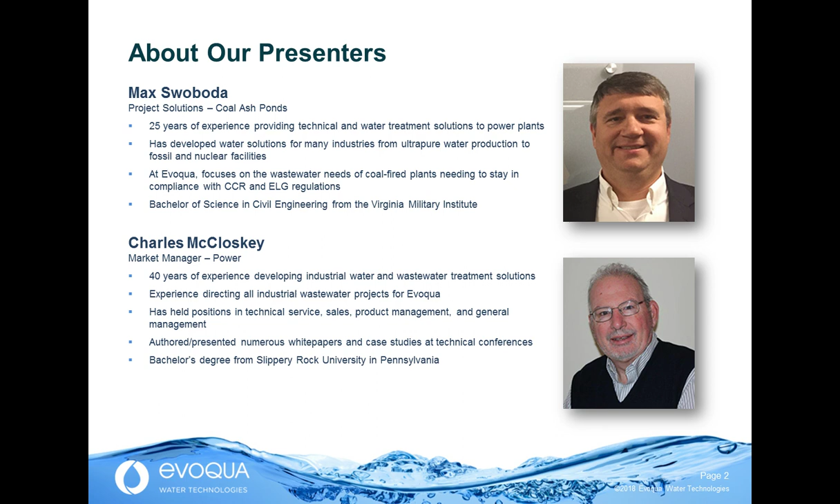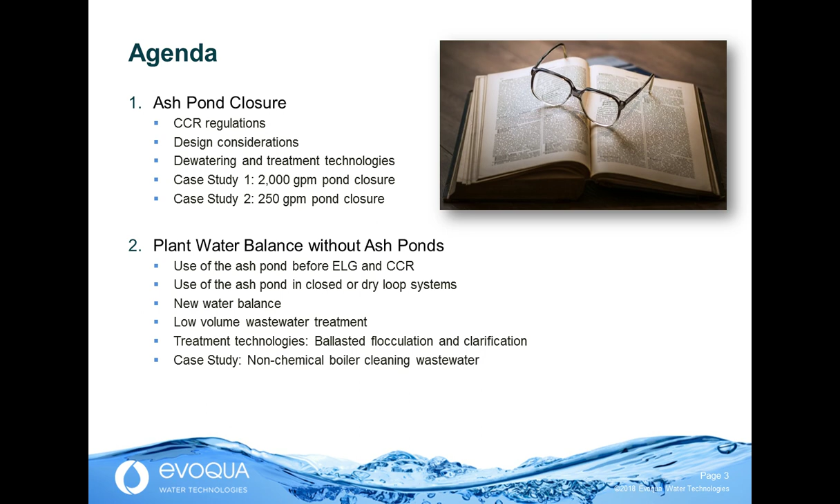Hello and welcome everyone. Today I'll take 10 to 15 minutes to step through some typical ash pond closure design items and case studies. Then Charles will take over for another 10 to 15 minutes to discuss life after ash ponds and what a future plant water balance looks like. He will also explore one resulting issue in depth, non-chemical boiler cleaning wastewaters.

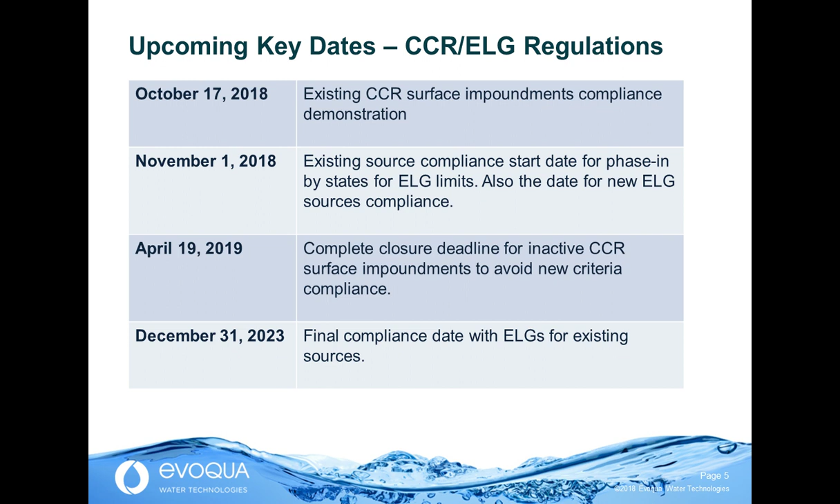Since the calendar has rolled over to 2018, we are already a number of years into compliance with CCR regulations. The next set of pending deadlines starts to come into play towards the end of 2018 and 2019. During this time, many source waters will be diverted from CCR impoundments and will require treatment systems to close the impoundment. Being less than 1 year away, the deadline is generating interest in temporary treatment systems while plans and construction of permanent systems are ongoing. Concurrently, groundwater monitoring and systems for corrective actions are also anticipated.

That brings us to our poll question here. How will these key dates for your CCR and ELG regulations affect when you need to stop using your ash pond? All right, the responses that are available here are: my plant will stop using our ash pond effective January 1 of 2019. Or we'll continue using our ash pond beyond January of 2019. My plant's ash pond closure is in process or already closed. Or I'm not at a plant with an ash pond. And you can begin answering at any time.

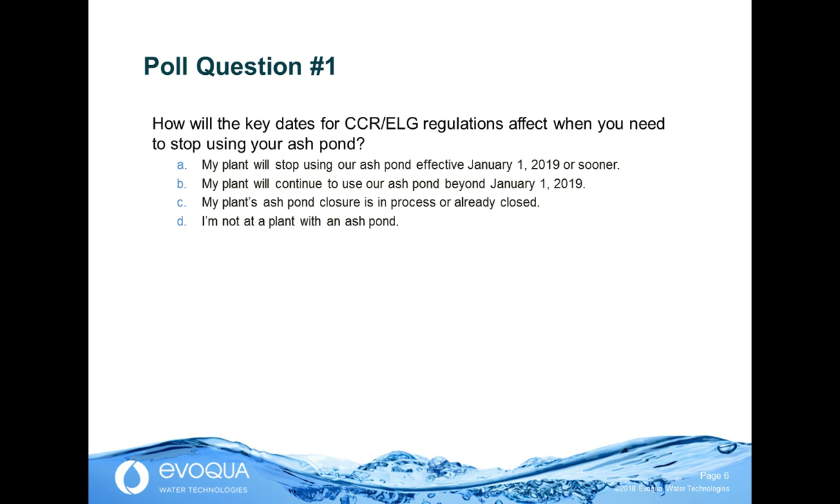We've got quite a few responses already in. Looks like we've got a lot of webinar attendees who don't work at plants with ash ponds, but they are split pretty evenly among the others that are still using or will stop using by 2019. We'll give you guys a little bit more time to answer the question and send out the results. All right, Max, I'll hand it back over to you. You can continue. Thank you.

Once this portion of the pond is disturbed, inlet water characteristics can change quickly, and the system needs to react to those changes. Groundwater from extraction wells and leachate can be low in TSS, but if this water was in contact with ash, it could require similar treatments as interstitial water in regards to the specific contaminants. Co-precipitation or reactive medias can be used to target these contaminants.

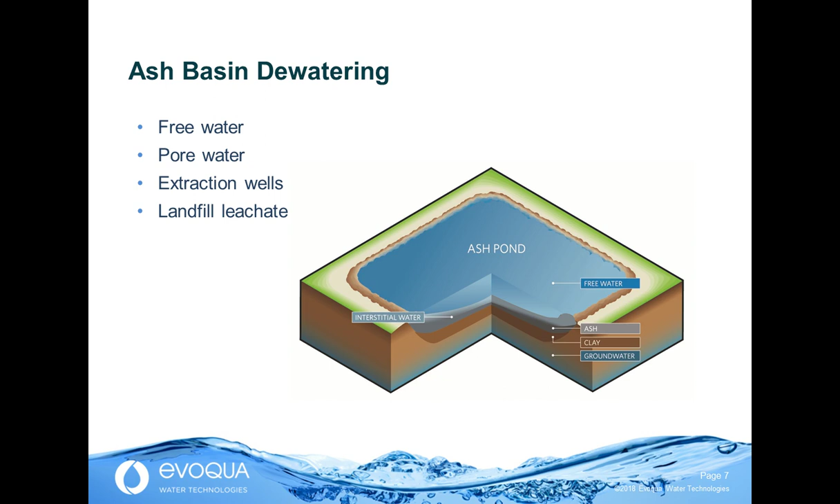There are several unique considerations in the design of ash pond treatment. First, timing. How long will the pond closure take? Size the system to match the schedule. Also, ensure that it can overcome setbacks from rainfall collecting in the drainage area. Public involvement should be expected and can cause delays, so seeking state approval before you mobilize your system is critical.

The location. The ponds are not conveniently located to plant infrastructure. Some compromise with regard to the distance from plant infrastructure and utilities is needed to provide proper support for the treatment system. The use of diesel-powered pumps and generators is quicker to set up than a dedicated electrical service. But on the other hand, running an electrical service eliminates the need for fuel, is more reliable, and could save money on longer-term projects.

Potable water is hard to come by in most remote locations, but is needed for safety showers and mixing chemicals. So if it is not available, a smaller treatment system or storage for these needs is required. Meeting the outfall limits is the greatest concern of any of these projects. Typical historical limits are not challenging targets to meet with temporary systems, but some states have tightened limits for ash pond dewatering, and the system must be conservatively designed to always meet these limits.

Lastly, the inlet water quality will change over the course of the project. Since the ash and water in the pond is not uniform, and the closure construction activities disturb the ash, both have an impact on the influent characteristics. Placing the pumps pulling the water out of the pond is important to prevent the feed water from changing, and keeping the pump in a location that's not affected by the daily closure activities is also important.

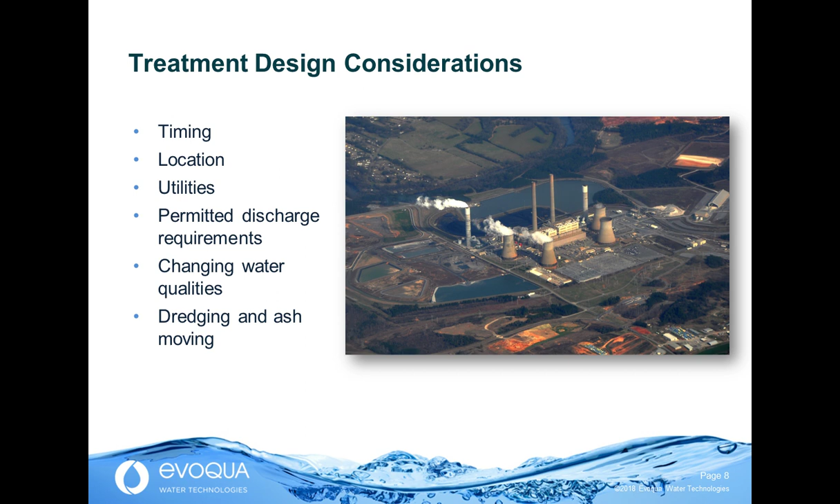The variables for pond closure are much the same as for any wastewater treatment application. Water quality in and out, as dictated by the local NPDES permit, volume to be evacuated, and flow rate, which is affected by the time frame of the project. All discharge waters will have to meet pH, TSS, and oil and grease limits as a minimum.

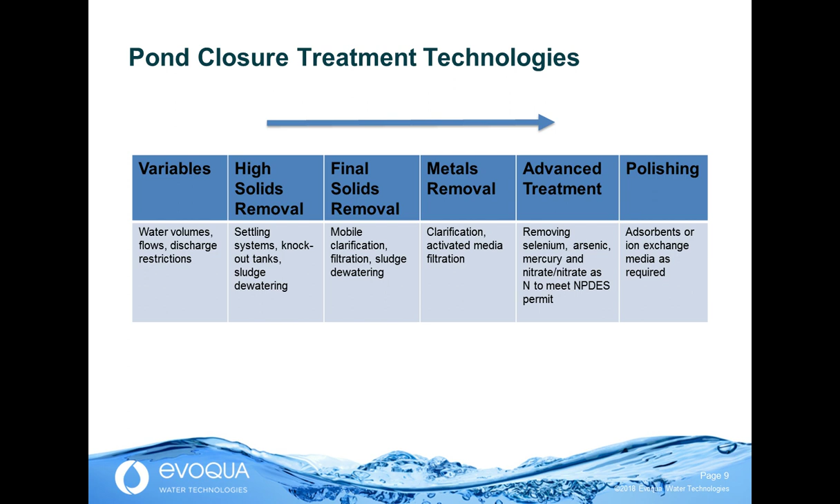So moving left to right on the table, the system design moves from simple free water treatment that is easily clarified and filtered with typical mobile equipment to tighter design requirements for metals and nutrient removal, where more extensive treatment is required. Activated media, wastewater ion exchange, and fine filtration all may be required to meet these limits.

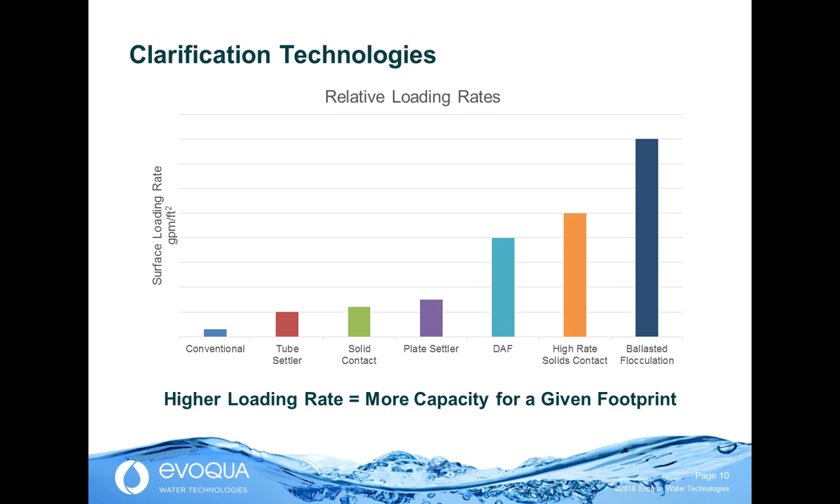Here is a chart for the relative loading rates of various solid removal technologies. Moving from left to right, the loading rate increases based on the ability of the system to settle floc particles against the upward rising water flow. As the loading rate increases, the footprint of the equipment can be reduced while the capacity of the system is maintained. Equipment footprint is a key cost driver for temporary systems. Reducing the footprint makes mobilization of the equipment to remote locations easier while lowering cost. Ballasted flocculation with magnetite can achieve some of the highest loading rates for clarification technologies.

Ballasted flocculation is the process of adding a heavy material to floc particles in order to increase the settling speed. Somewhat like a high molecular weight polymer that is used to grow floc mass and increase settling. A ballast material greatly increases the specific gravity of floc. In the past, ballast materials like clay and sand have been used, but now magnetite has been employed.

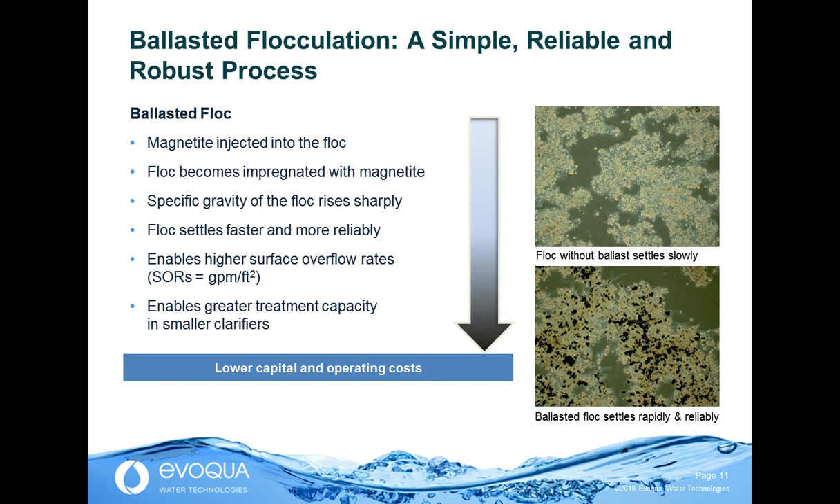Magnetite has three characteristics that make it an excellent choice for ballast material. First, it has a very high specific gravity, thus a high rise rate can be achieved. Next, it is magnetic, so after it has settled the floc, it can be easily separated by a magnet and recovered back to the front of the process. Lastly, it is not expensive.

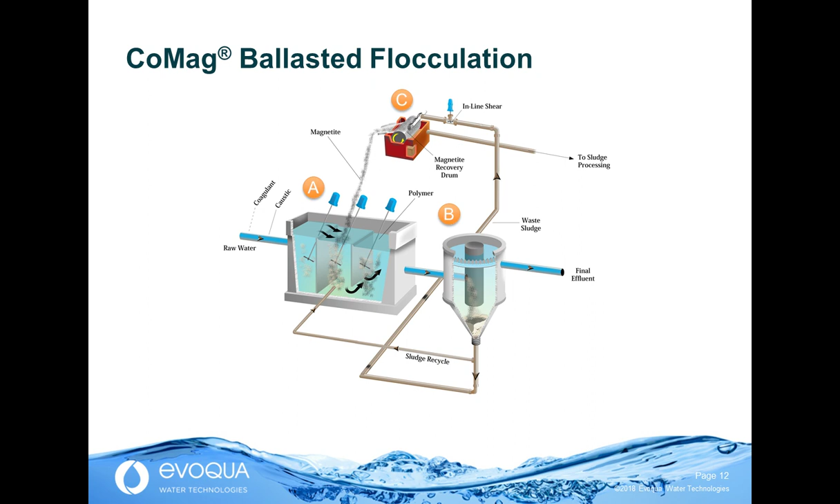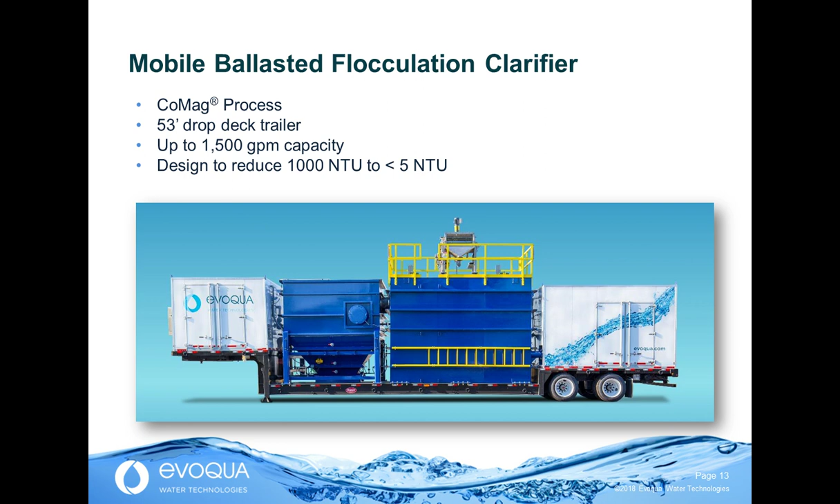Since ash pond closure projects have some unique constraints, such as finite need, since once the pond is closed the system is not required, remote locations, and high treatment volumes, some traditional technologies are poor fits for the project requirements. The mobile ballasted CoMag process helps meet these unique requirements. In a mobile package design, the technology can deliver up to 1,500 GPM of treatment on a single semi-trailer footprint. The system is pre-plumbed and wired so that only minimal setup is required.

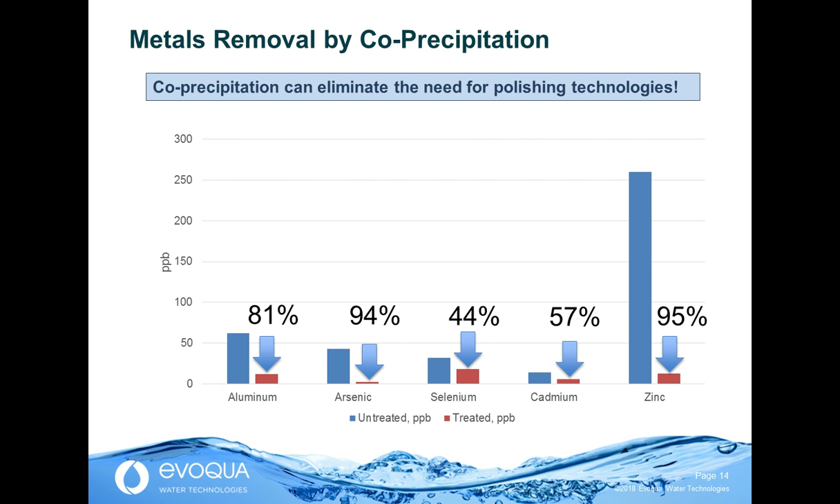When selecting a chemical treatment solution, co-precipitation of some ions can be achieved by ballasted clarification. Depending on the outfall limits, this can be an effective means to reduce dissolved ionic contaminants to an acceptable limit. Arsenic and zinc are two elements that show an over 90% removal rate by co-precipitation. Removal by this method can eliminate the need for a polishing technology.

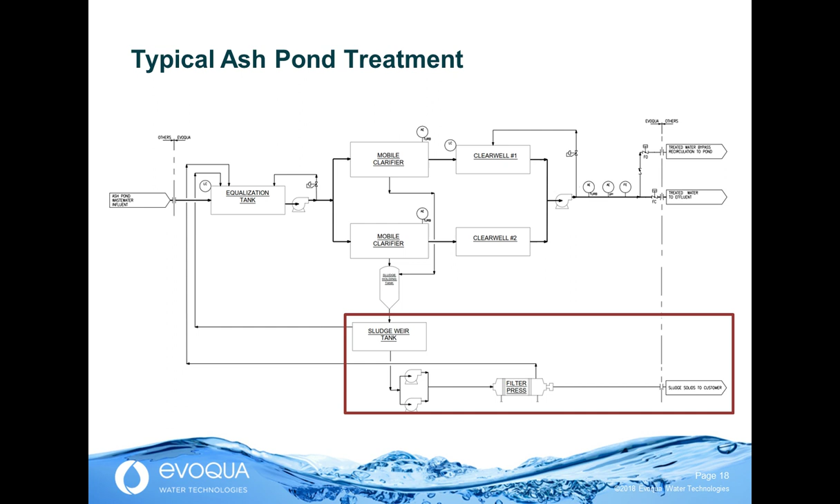A system similar to the one shown in the process flow diagram was used to dewater ash at a closed power plant. Because the plant demolition was already underway, utilities and support infrastructure were limited and factored greatly into the execution of the system design. The system uses co-precipitation to meet a zinc and arsenic outfall limit.

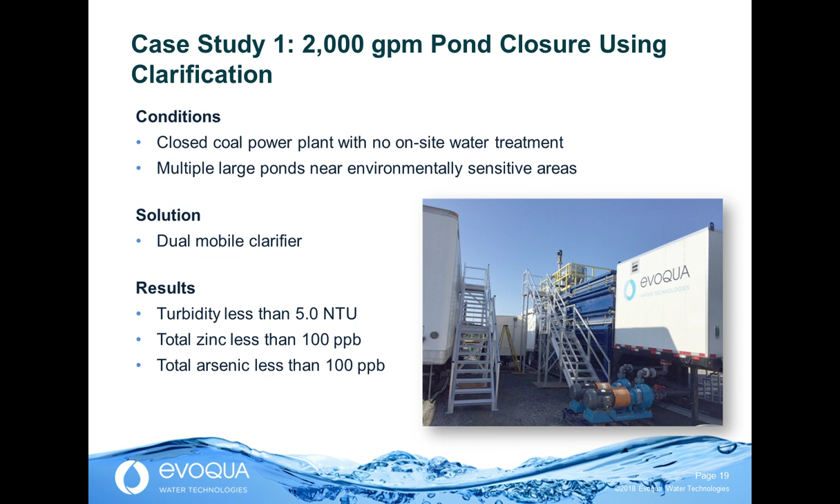Another example system is a 250-gallon-a-minute system that uses a reactive media technology called poronics for selenium removal. Here, the selenium limit could not be met by co-precipitation alone. Thus, clarification and reverse osmosis are used to concentrate the selenium before the reactive media system. Concentration in this fashion reduces the footprint of the poronic system by 4 times.

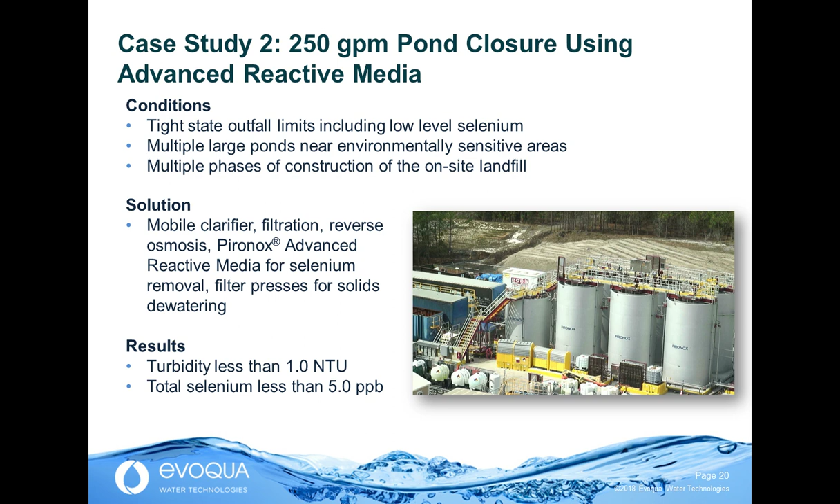For operating steam plants, what is the impact of closing the ash basin before and after? So why would an existing operating steam plant close their ash basin? Some of the key criteria: is the basin lined or unlined? All unlined basins will need to be closed.

In addition, what is the condition of the liner, berms, or dams? What is the proximity to waterways, habitats, and communities? Has there been any seepage or outleakage affecting groundwater? And what is the overall short and long-term liability of maintaining the ash basin?

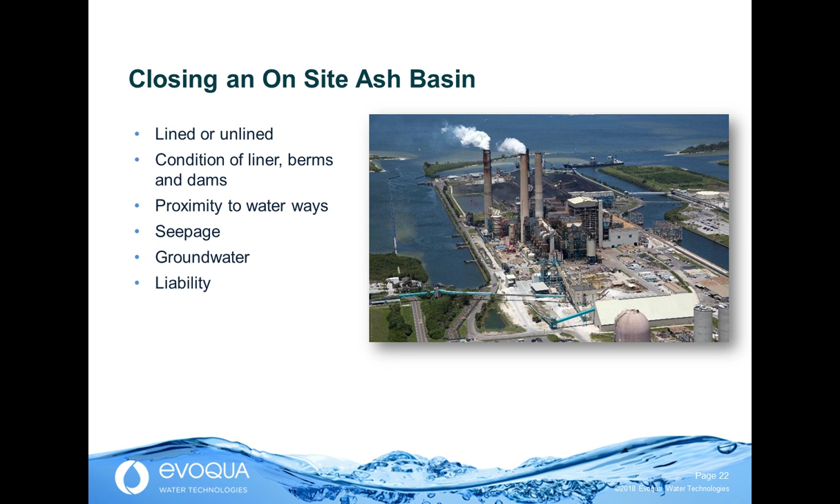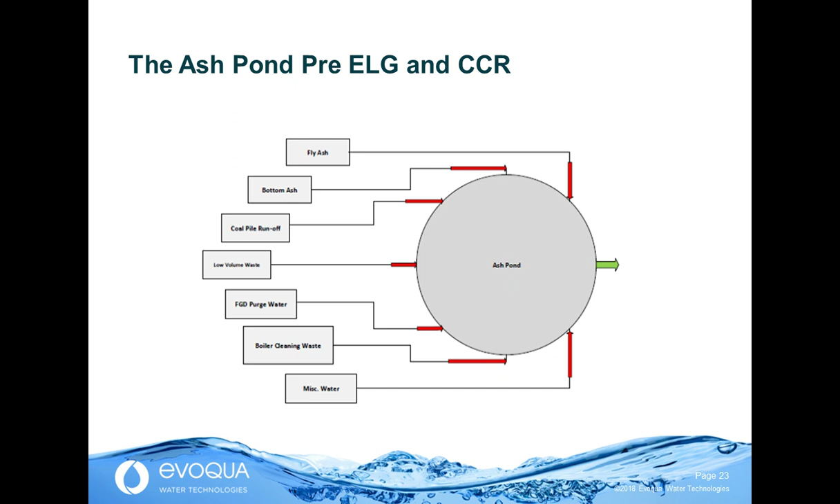A typical plant water balance prior to the ELG regulations and CCR regulations looks something like this. The primary purpose of the ash basin was for the transport and settling of bottom ash and fly ash. With the implementation of the ELG regulations, fly ash and bottom ash could no longer be sent to the ash basin and needed to be handled by dry ash handling or a closed loop system. What happens to the remaining flows when the ash basin is closed and the ash basin goes away?

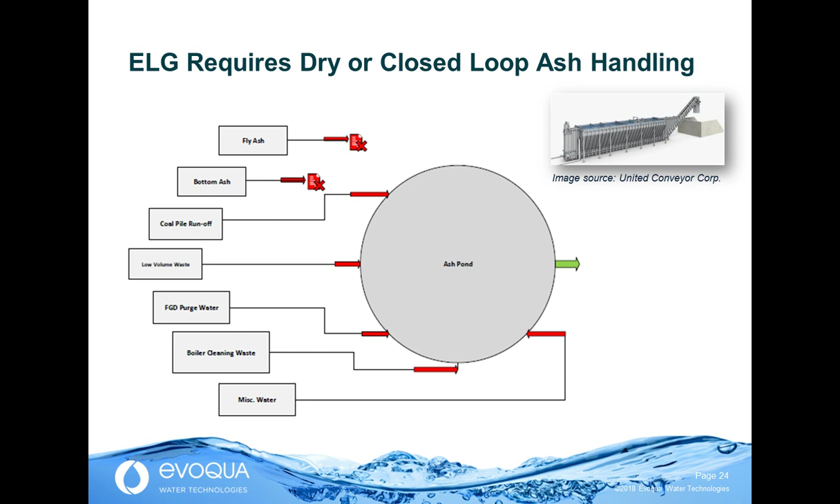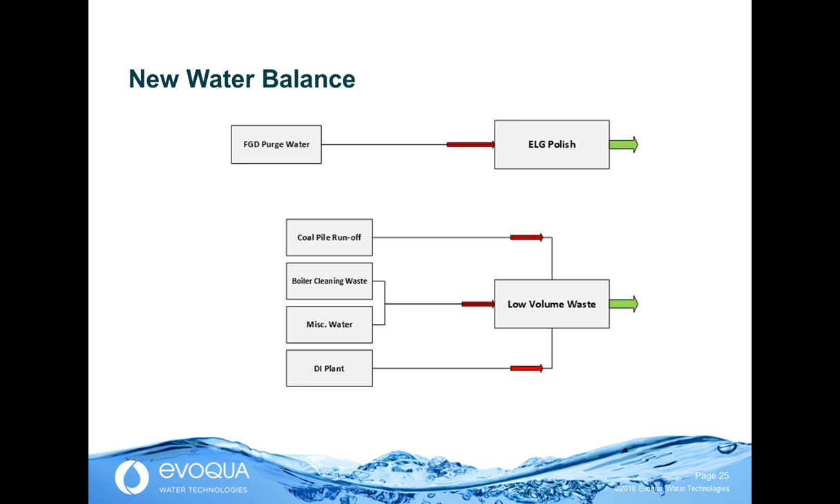A new plant water balance might take a shape of something like this. The ELG requires specific guidelines for FGD purge water, and an FGD purge system and polish system may be required to meet these new limits. The remaining streams may be handled individually or combined as low-volume waste. The overall process of establishing the new plant water balance is often called redirection.

When we talk about low-volume waste, we're not talking necessarily about low flows. We've seen flows as high as 8,000 GPM in the low-volume waste treatment system. The low-volume waste treatment system will capture all of the remaining streams that used to go to the ash basin: coal pile runoff, process water from the plant makeup system, stormwater, seal water, boiler and cooling tower blowdown, boiler cleaning,

and miscellaneous wastewaters. The basic treatment required will be TSS removal, pH adjustment, and oil and grease removal. And depending on the unique effluent requirements of the site, some metals removal might also be required. The treatment options are settling basins, traditional clarifiers, or ballasted flocculation.

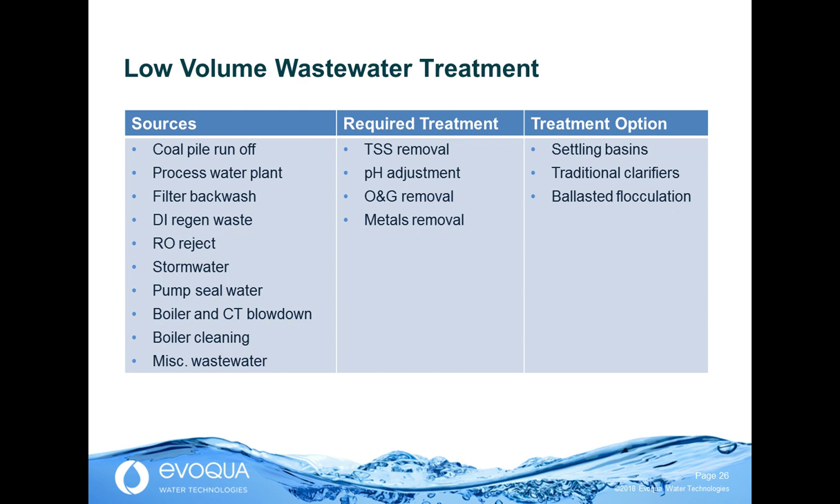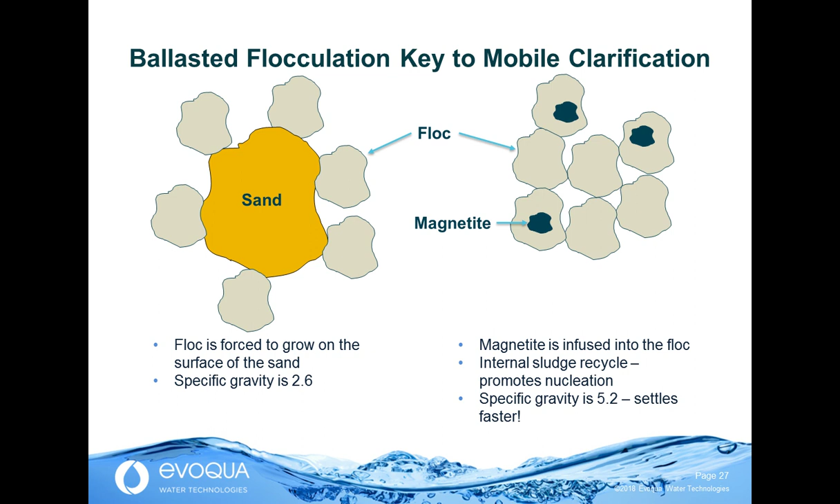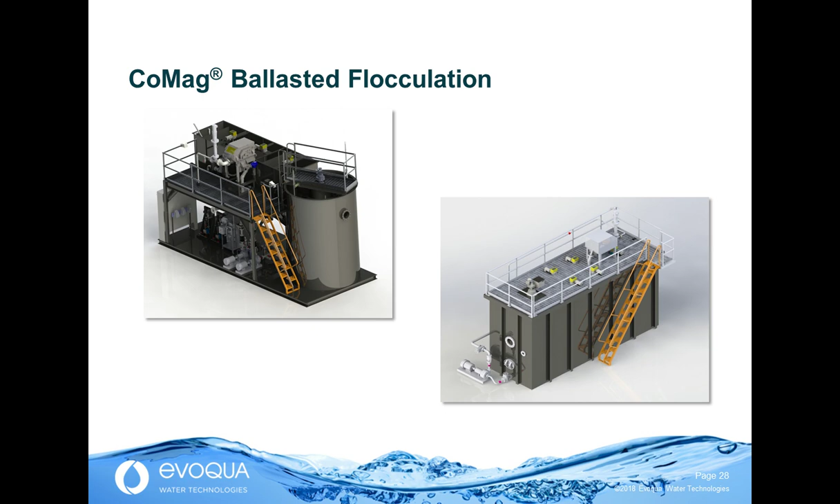Again, ballasted flocculation is an important tool in clarifying this water. As Max indicated, several ballasts have been used in the past, but most recently magnetite has been used because it has a higher specific gravity, resulting in a faster settling rate. This means higher rise rates, smaller footprints, and lower installation cost. In addition to the mobile system that Max showed earlier, there are also field-erected and skid-mounted systems that can be matched to the individual flows of any of the treatment streams or the overall low-volume waste treatment system.

Now I'd like to take a look at a specific stream that may require specific individual attention. This is the non-chemical boiler cleaning wastewater. This is the wastewater that is generated when the back end of the boiler is periodically cleaned during outages. This is usually high-pressure water blasting around the firebox, the air preheaters, the economizer, and even the electrostatic precipitator. This waste stream is characterized by high flow rates for a short duration.

These outages usually only last for 3 to 10 days. The solids that are generated can be quite high. We've seen up to 20% TSS loading in these water streams. Depending on the type of coal, the pH can be very, very low or very, very high and require pH adjustment prior to discharge. And there will also be dissolved metals in this waste, most notably iron.

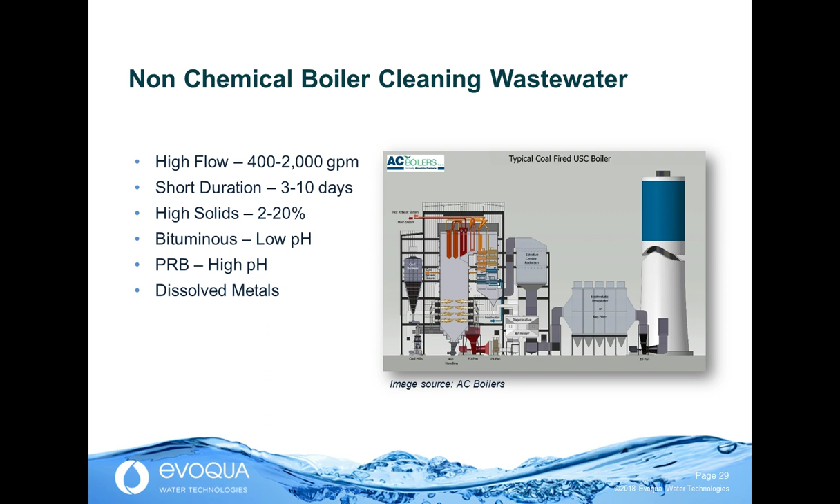The ELG left reserved specifications for treating this water, but did say that nothing less than the best available technology should be used, and that must meet the local NPDES permit. If it's directed to the low-volume waste system, it could have an immediate effect if the system is undersized, or the low-volume waste system would need to be oversized to handle this periodic waste stream.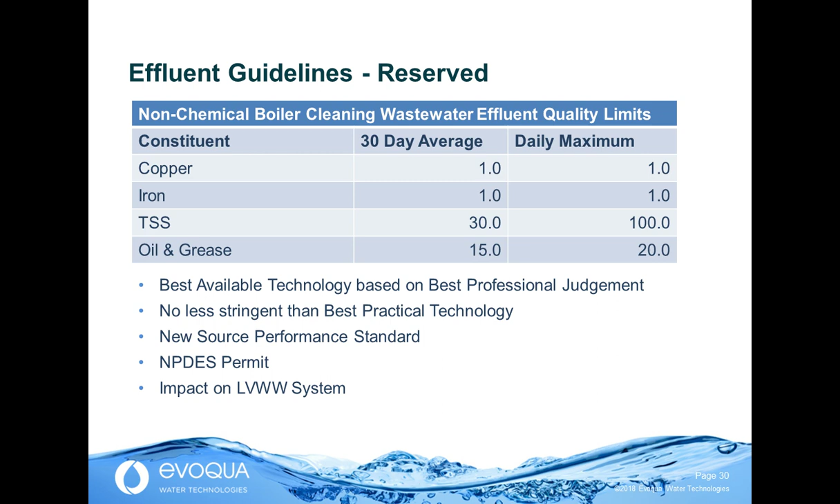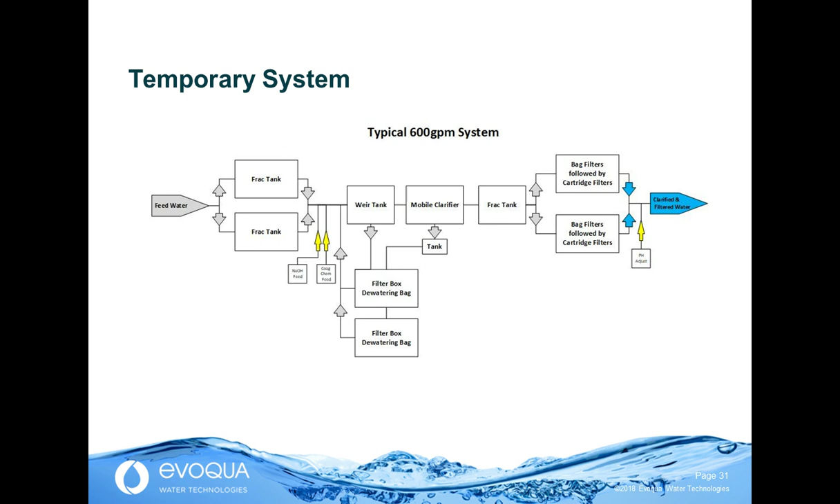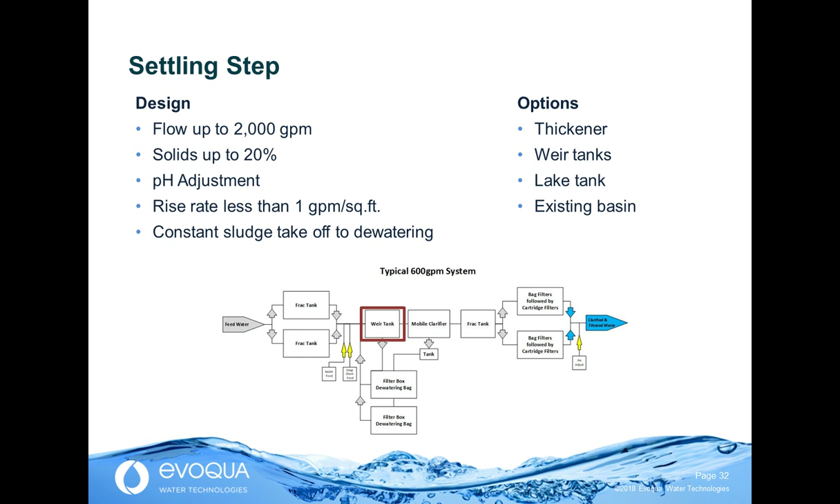Another option is to deal with this waste stream as a temporary system during the individual outages. This is what a typical flow diagram might look like for a temporary system to handle non-chemical boiler cleaning wastewater. Let's look at each step. Settling would be very important. Flows up to 2,000 GPM and high solids; this is where initial pH adjustment would occur. To get good settling in this step, rise rates of less than 1 GPM per square foot need to be accomplished. And constant sludge takeoff has to be accomplished to sludge dewatering, or the settling tank will be overwhelmed. Options for settling include an existing basin, lake tank, weir tanks, or thickeners.

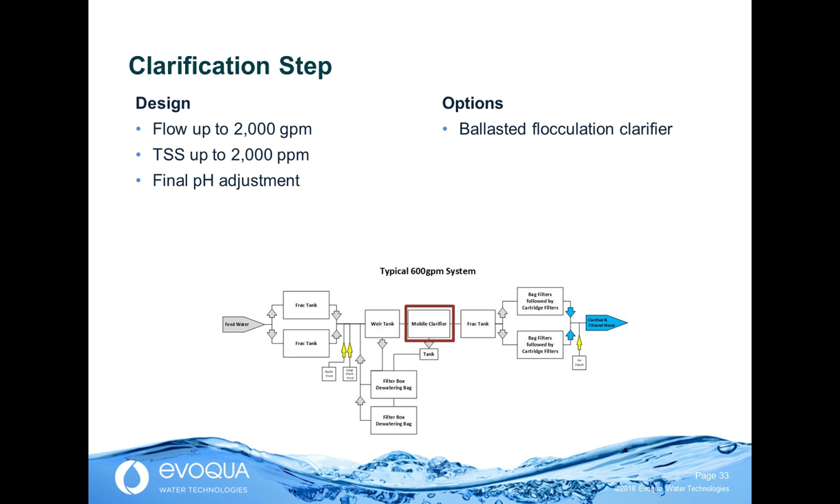The next step is clarification. The flow goes forward. The TSS is reduced from the very high level in the percent basis down to about 2,000 ppm. This is the place for the next step in pH adjustment, coagulation and flocculation, and removal of the fine solids down to the single digits of NTUs or ppm.

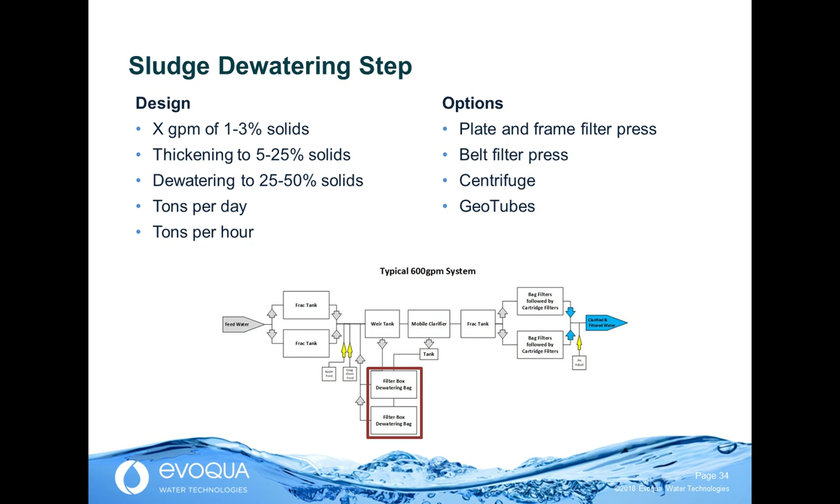I would like to turn it over to Aaron to ask the next poll question. All right. Our next poll question is, how will the key dates for CCR ELG regulations affect when you need to stop using your ash pond? Aaron, you should be on poll question number 2. I'm sorry, I missed the number.

Okay. When are you planning your next non-chemical boiler cleaning application? So there's 3 choices here: within the next 6 months, greater than 6 months, or it's not applicable for some attendees. So the question should be out there, and attendees can answer at any time. Looks like for a lot of attendees, the question isn't applicable. They're not doing non-chemical boiler cleaning. But for the remainder, it looks like the greater than 6 months is more prominent, but a few within the next 6 months. Very good. Thank you for responding.

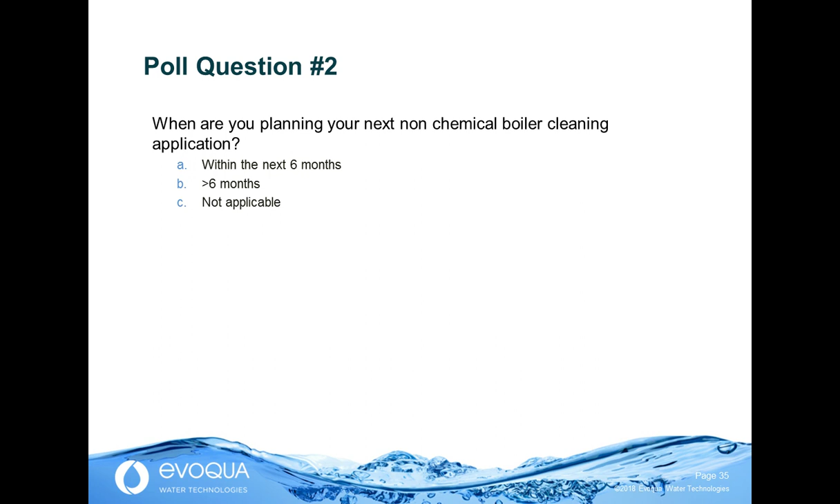Let's take a look at a couple of case histories. The first case history occurs at a plant that has the advantage of an existing settling basin. They also have an on-site clarifier rated at 200 GPM. But during the boiler cleaning process, the flow surges to over 900 GPM. The plant is burning Illinois Basin coal and requires pH adjustment with lime to achieve proper pH for discharge. The plant has 2 outages, one for each unit, 5 to 10 days each, once every year.

The turbidity surges during this outage up to 1,200 NTUs. We supply this customer with a mobile clarifier that reduces the turbidity down to 10 NTUs and total iron down to less than 1 ppm. This is an existing customer that has used this process every year for the last 5 years with a successful application.

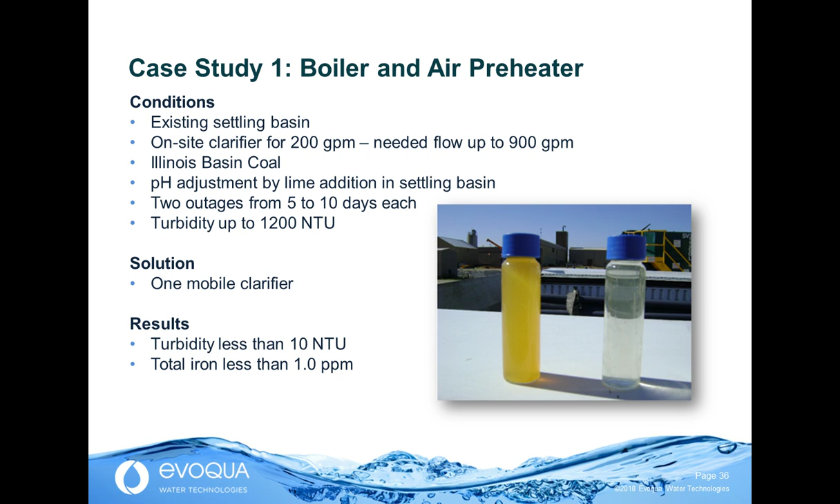Let's take a look at another case history. This particular location did not have the advantage of a settling basin, so a bank of weir tanks were installed to provide initial settling. After settling, the settled water went forward to mobile clarifiers. The design flow was up to 2,000 GPM, so 2 mobile clarifiers were supplied. Due to very tight regulations on dissolved iron, or total iron, in the discharge, final filtration was added after the clarifiers. Sludge dewatering was attempted with lined filter boxes.

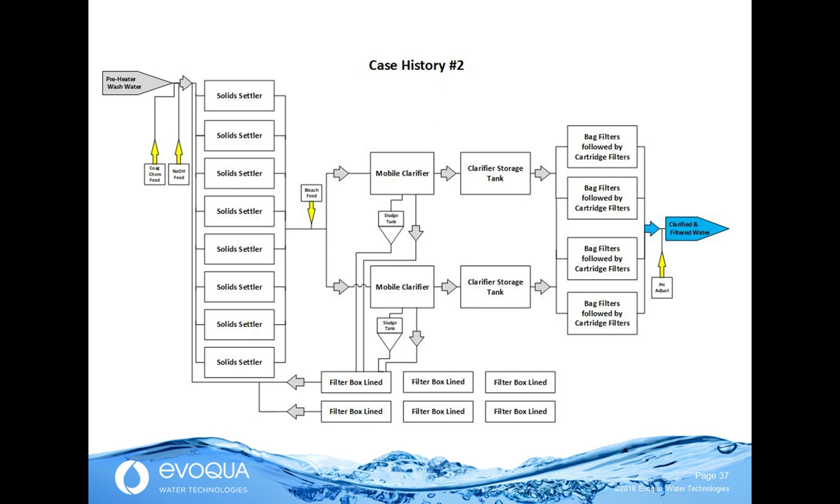This application occurred over 5 days, a very short period of time, and was focused on the air preheaters. Flows surged up to 2,000 GPM, and the turbidity surged up to 2,200 NTU. The turbidity was reduced in the settling step down to about 450 NTU. Out of the clarifiers, 10 NTU, and out of the final effluent, less than 5 NTU.

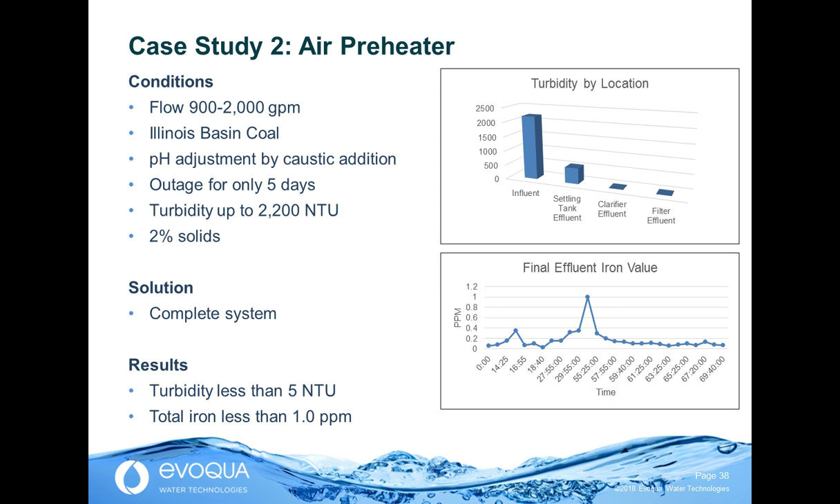The iron results are shown on the bottom graph and were dramatically below 1 ppm for the entire outage, except for one filter change-out period when it just hit the upper limit of 1 ppm. Lessons learned during this application were, one, that you can get very uneven flow during the water blasting. Working with the contractor to even out flow and create some surge capacity is the key to maintaining good performance in the settling step and the clarifier.

Rapid settling can occur in whatever settling step you have. In this instance, it was the weir tanks. So with rapid settling, efficient sludge takeoff is required to maintain the settling performance. Finally, it took a long time for dewatering in the lined filter boxes. We decided this was not the optimal design for an efficient dewatering of the solids.

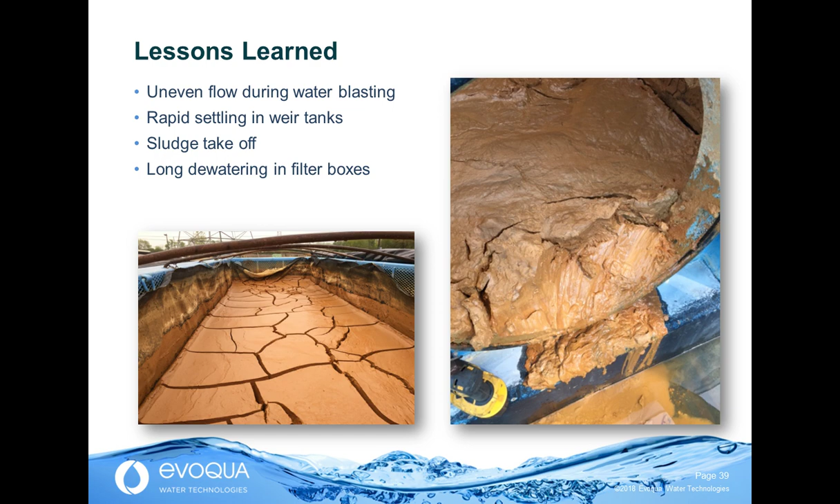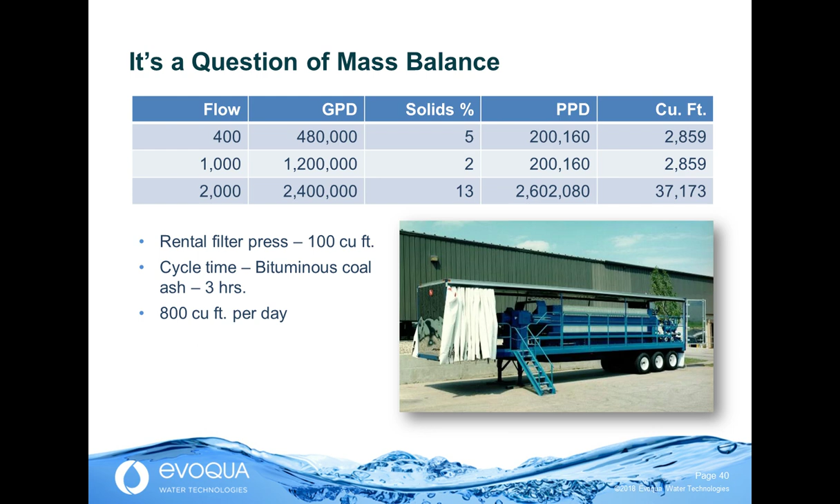It really becomes a question of mass balance. So when you're taking a look at a particular application, you should look at the flow, the percent solids, and the pounds per day and cubic feet of sludge that will be generated. You must size the sludge dewatering system to be able to handle this very high amount of sludge in a very short period of time.

Some options that are being investigated to increase sludge handling in a short period of time are mobile centrifuges and belt filter presses. If more space is available, we could also consider dewatering with geotubes. For higher volumes and sludge capacities, we're also looking at larger settling tanks, such as a lake tank.

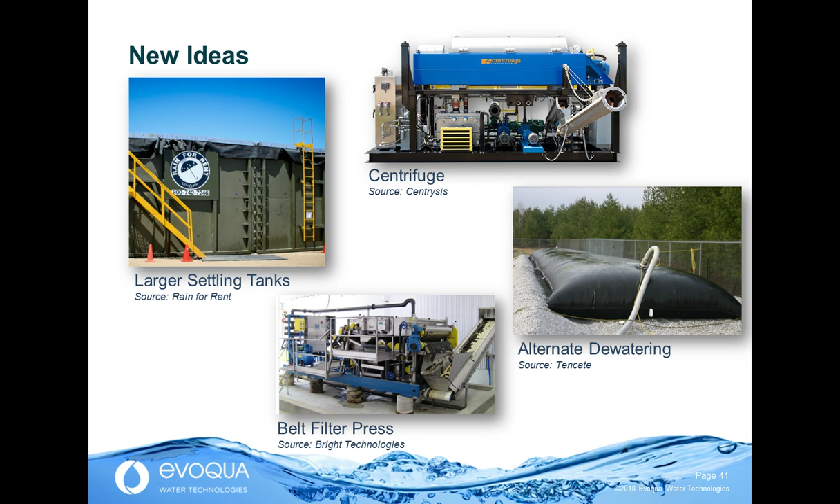Whether you're looking for an ash basin closure, design of a low-volume waste system, or a temporary non-chemical boiler cleaning wastewater treatment system, the steps are very similar. Good analytical data collection, which can sometimes be quite difficult if it's an intermittent or uneven waste stream that you're dealing with. Timing, counting back from the compliance date. When will you need to have the system up and running, tested, and working before compliance is required?

A good plan of attack with engineering and design of all key components. Identifying the key components that may be required, either capital, mobile, or ancillary equipment. And then execution with a trusted partner.